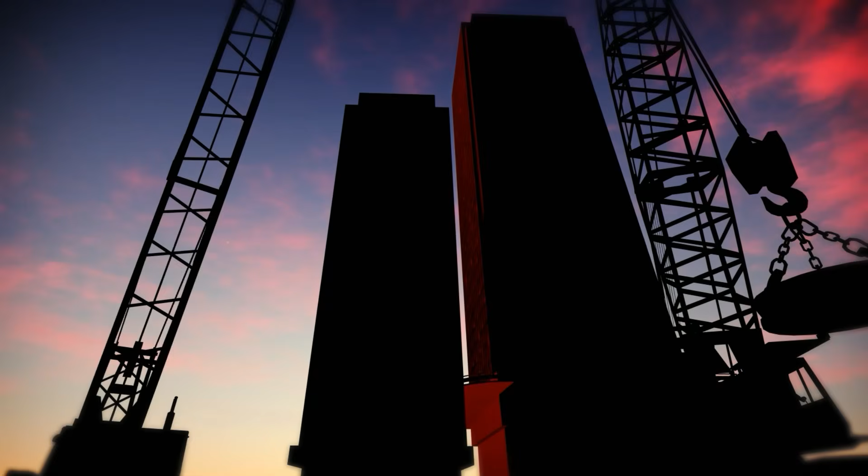On the other hand, Unit 2, also known as TMI-2, was plagued with issues. First of all, there were massive delays in the construction process, which should have only taken 6 years but wound up taking 9. Building began in 1969 and wasn't completed until 1978. That's enough time for 2 Godfathers, 2 Jaws, and 1 Star Wars. And a Star Wars holiday special, which is a different type of catastrophe.

But that wasn't all. Once the reactor started operating, it suffered a series of unscheduled shutdowns. That's bad. If your refrigerator did that, you'd take it back to the store. But a nuclear reactor is a total pain to return.

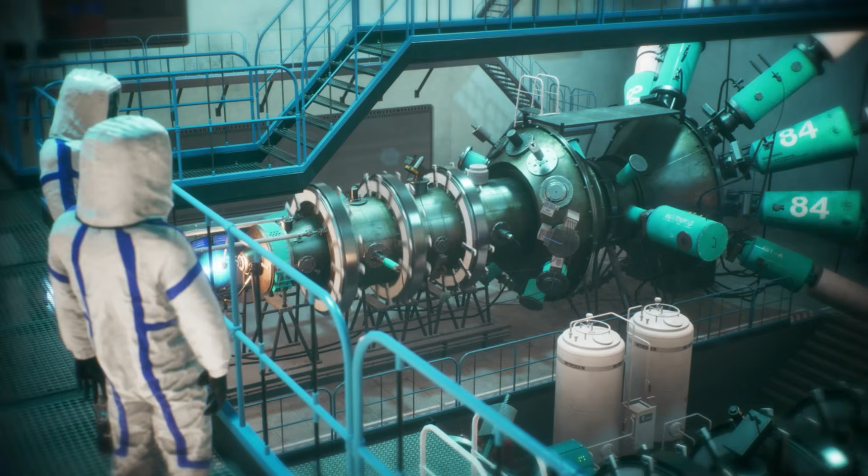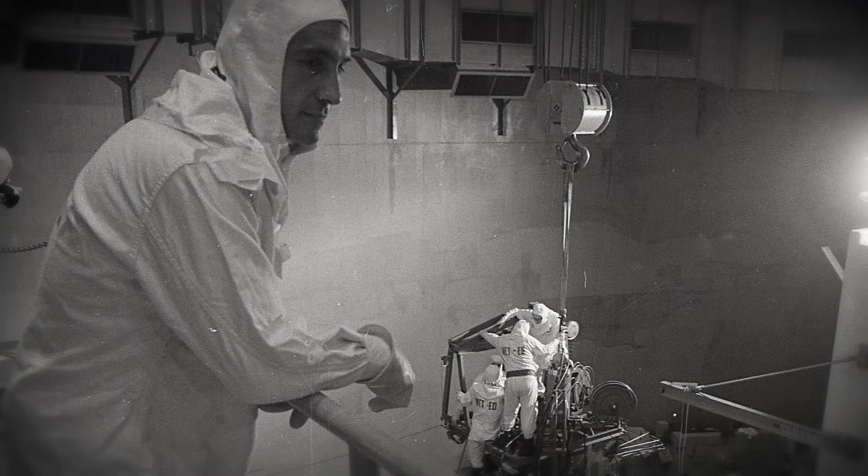The workers operating Unit 2, who weren't eager to be out of a job, didn't want the government shutting the reactor down for good. So they decided to start falsifying data about the reactor's performance to the Nuclear Regulatory Commission. And while we totally understand pencil whipping a few things if you're working the closing shift at El Pollo Loco, the stakes are a little higher when you're splitting atoms. The stage was already set for something to go terribly wrong.

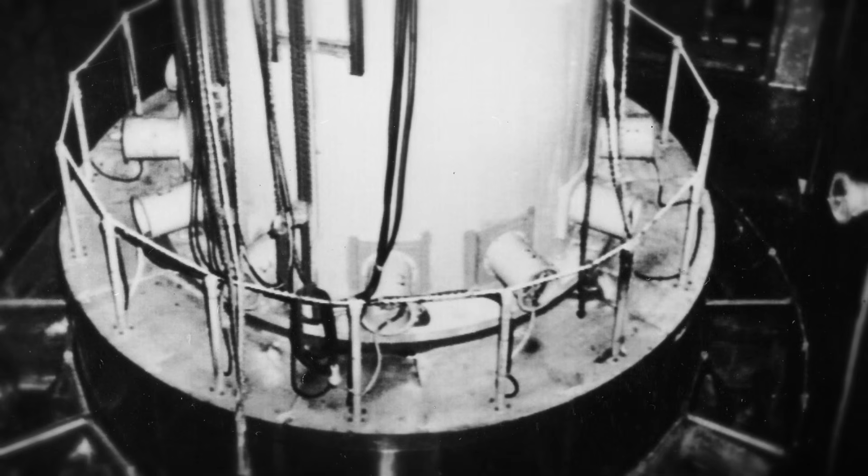On March 28, 1979, the pump that sent hot water to the reactor's steam generator failed for reasons that are still not entirely understood. Some suspect it may have been the fault of a valve getting stuck in the closed position, or water that leaked into an air line, but there's no way of knowing for sure. In response, the plant's turbine immediately shut down, expelling a huge plume of high-pressure steam.

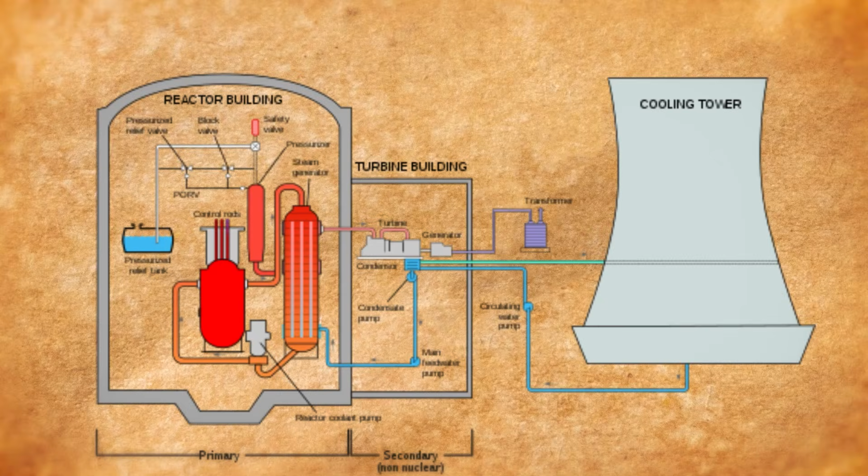Without the steam generator to feed it water, the feed water pump in Unit 2 also quit working. This particular pump was designed to provide a non-stop flow of water to the steam generators that kept the nuclear core of the plant cool, which is really, really important.

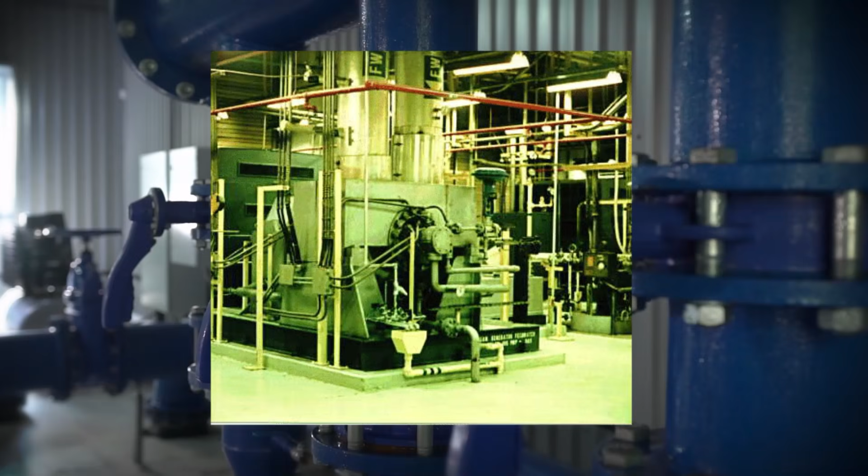As long as the nuclear core is being cooled, it works just fine. However, when it's allowed to heat up, a catastrophic chain of events begins, leading to the nuclear core going critical and then melting down. The result is a release of nuclear energy that spreads throughout the atmosphere. And while atomic clouds may grant people superhuman powers in the MCU, in real life, they mostly just give you cancer.

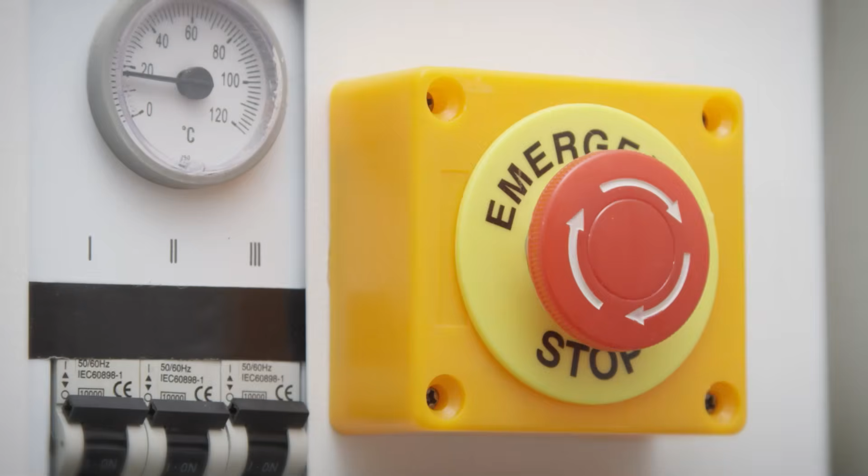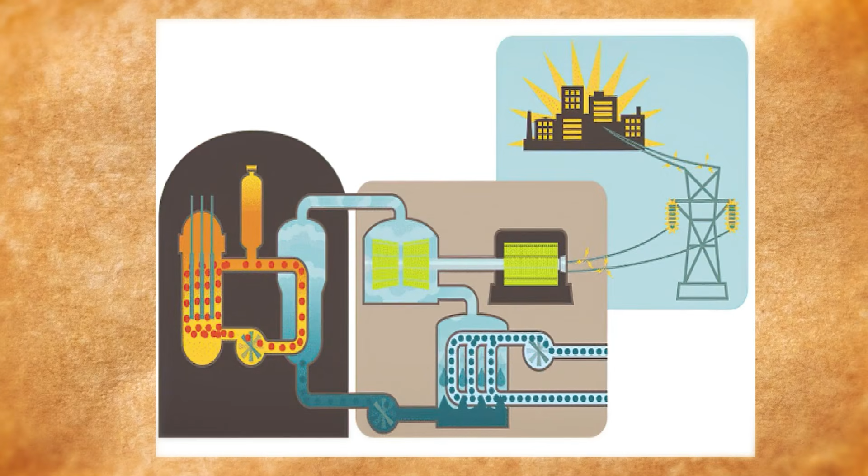When the pump stopped working, the plant went into emergency shutdown mode, and the chances of a meltdown at Three Mile Island increased. With the whole system shutting down, the pressure inside the reactor began to fall. Normally, this sudden drop in pressure would trigger the relief valve to close and stop venting steam. This time, however, the valve was stuck open, so steam kept pouring out of the plant, which steadily lowered the water levels in the reactor.

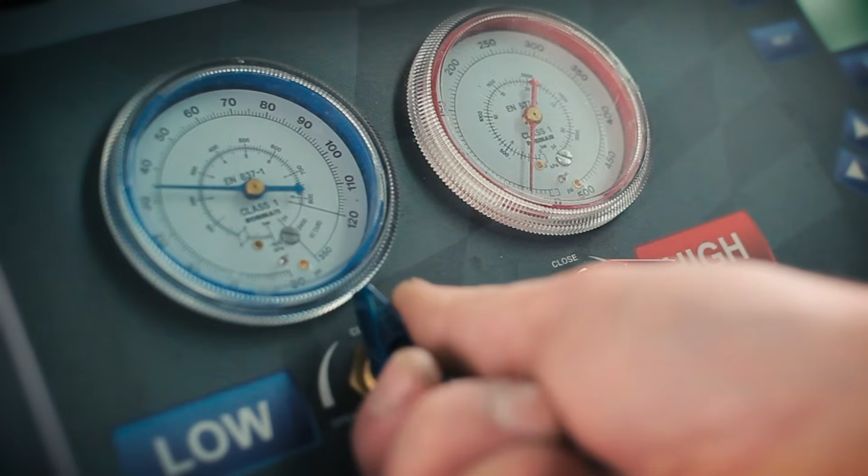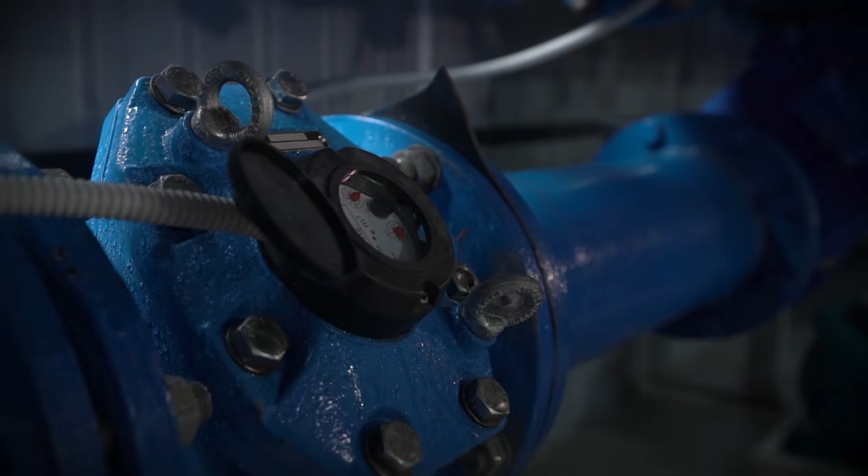At this point, you may be wondering why there weren't backup measures in place in case the feed water pump malfunctioned. Well, as it happens, there was. But like everything else at Three Mile Island that day, the backups were as effective as a drunk relief pitcher. When the main feed water pump failed, an emergency pump should have automatically switched on. However, the emergency pump's relief valve was stuck in a closed position. What is with all the sticking? Did they sculpt this thing out of graham crackers and peanut butter?

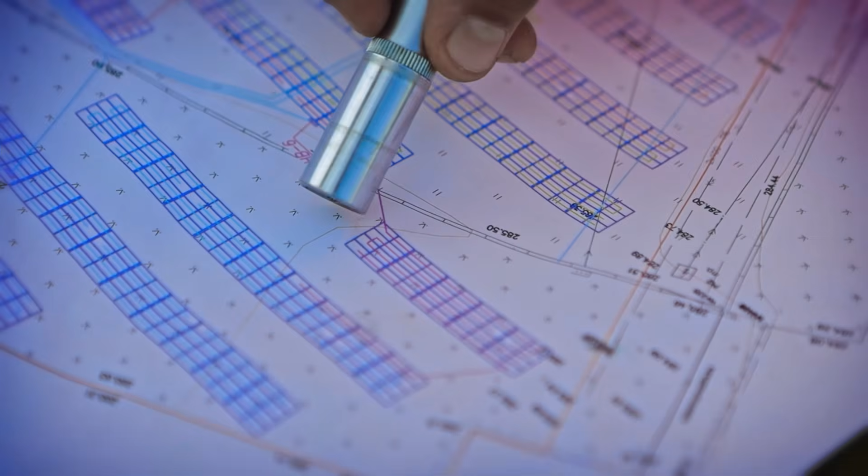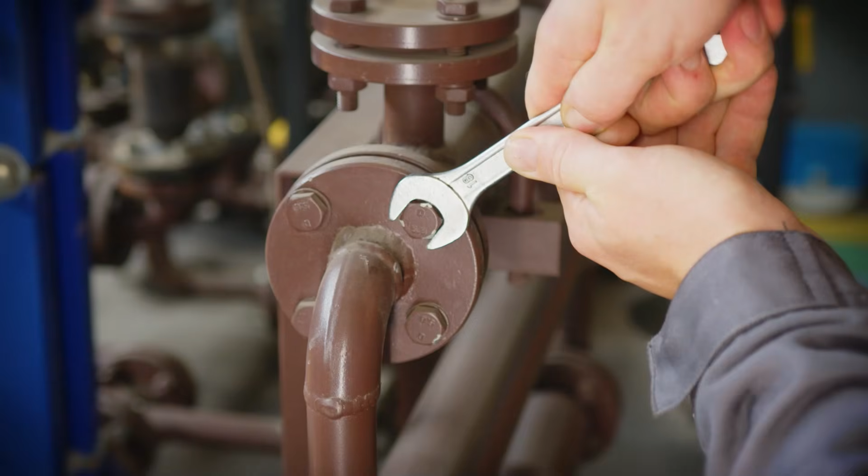While it sounds like a case of Murphy's Law, this particular failure was the direct result of human error. A few days prior to the meltdown, the backup pump was tested several times and found to be in good condition. However, in order to conduct those tests, the valve had to be operated manually. When the valve is properly open, the backup pump will kick into gear like it's supposed to. But someone left the valve closed after the tests were completed. Consequently, the backup pump did not turn on, and the water near the core kept venting out, allowing the core's temperature to keep climbing.

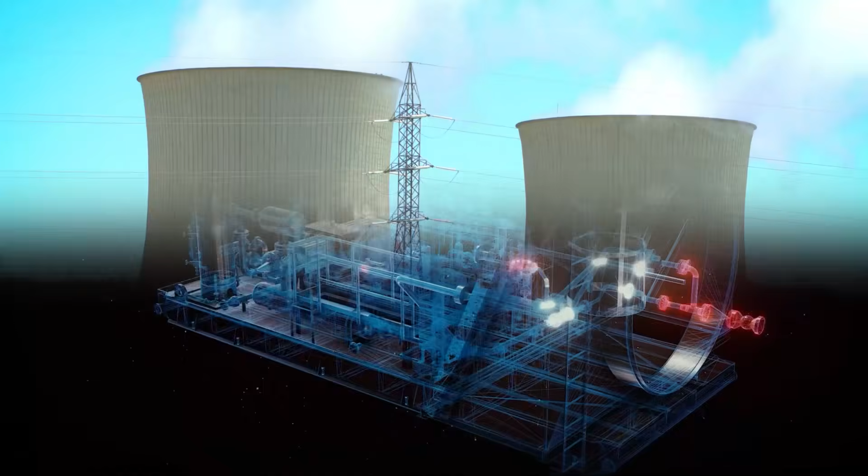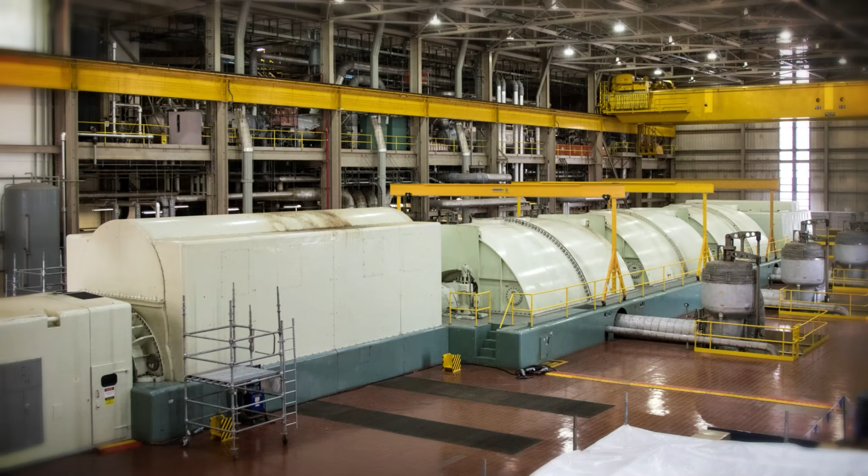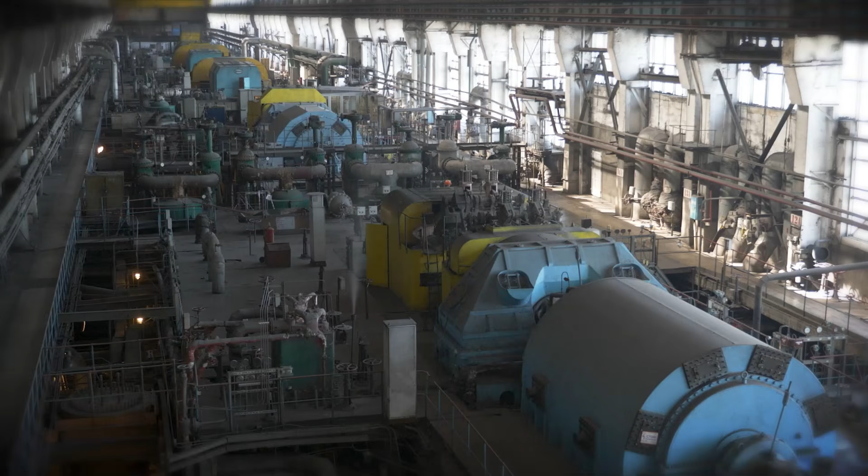And if all that wasn't bad enough, the mishaps continued to snowball out of control. The instrumentation in the control room failed to alert the operators of the growing problem. They could tell the main pump had stopped but believed that the backup pump was working properly. It didn't help that the emergency pumps in that reactor had turned on for no reason several times in the past, so workers had been conditioned to assume it wasn't anything serious. And even though the valve venting steam was stuck open, the control panel's confusing readings seemed to indicate it was closed. The operators had no idea that cooling water was steadily leaving the reactor in the form of steam.

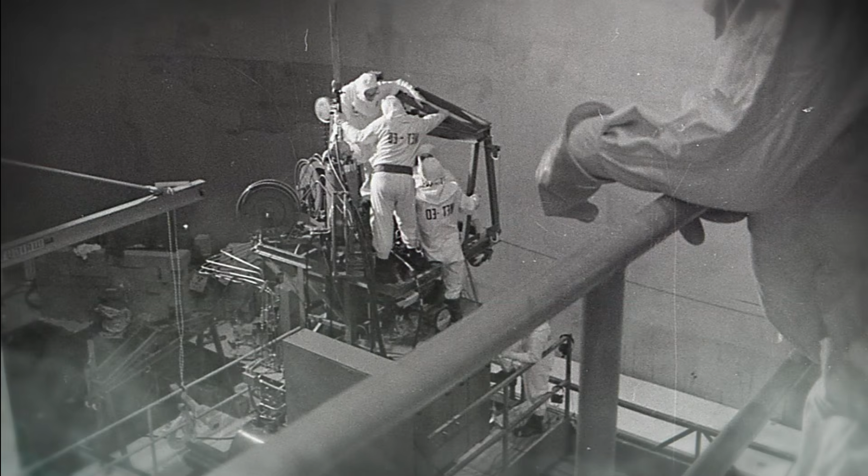The general design of the plant didn't help matters either, as there wasn't any way for the operators in the control room to see how much water actually surrounded the nuclear core. Because of this, and the faulty readings in the control room of Unit 2, workers thought the situation was under control.

They believed the reactor was filled with water, while in reality, it was filling with steam. So, in order to prevent the reactor core from getting flooded, the workers shut down the water flow. This just made the core, which was already dangerously low on water, even hotter. According to a follow-up report, there were 2 gauges that should have been checked before taking action. An employee later admitted to having checked only one, which led him to believe the space was filling with water instead of running dry. Mounting steam pressure then caused the coolant pumps to start vibrating, so plant workers turned the pumps off to keep them from getting damaged.

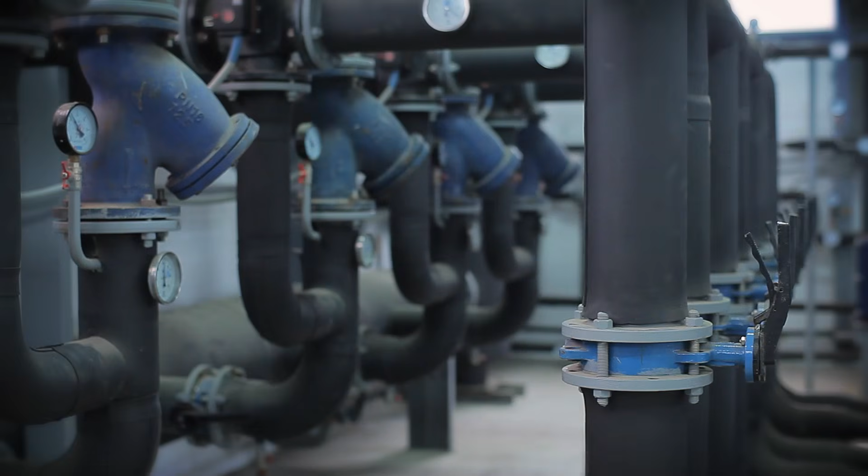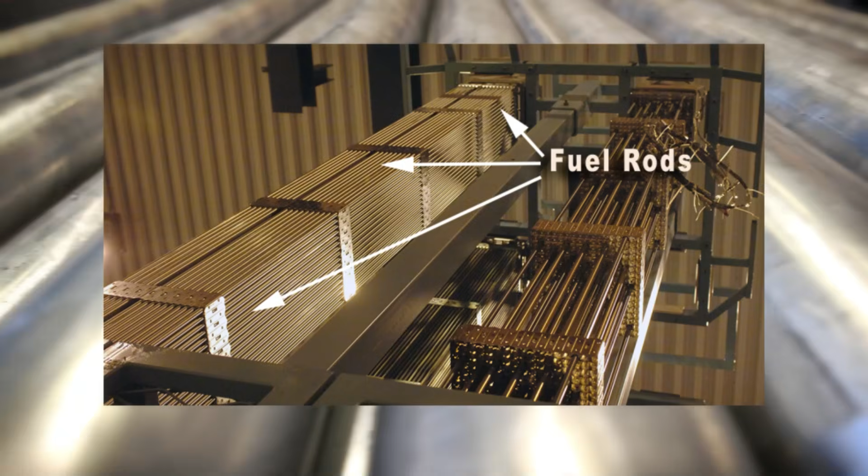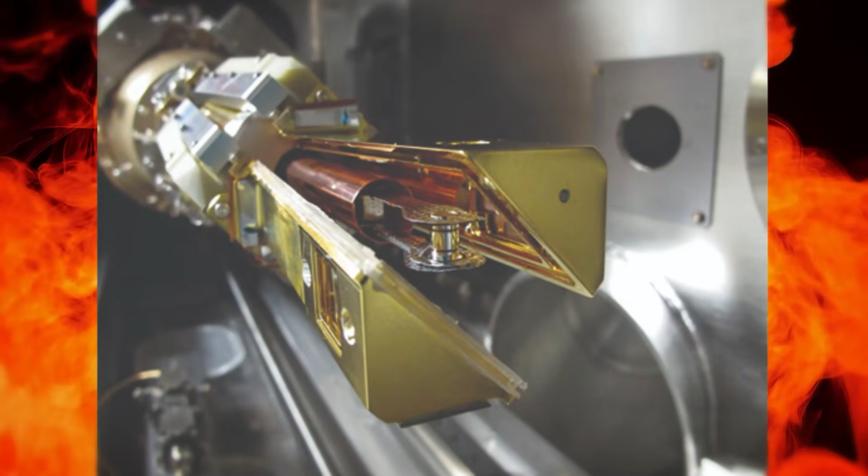At that point, the flow of water that cooled the Unit 2 reactor core had been completely halted, and the effect was exponential. Since fresh water was no longer flowing into the reactor, large portions of the reactor core became uncovered as steam and old water escaped. The fuel rods, which held the nuclear pellets that fed the reactor, started to melt. To give you an idea of just how serious this failure was, the rods were made of zirconium, a compound with a melting point of about 1,850 degrees Celsius, roughly 1/3 the temperature of the sun. That is hot. A full-scale meltdown had begun, and nobody knew it was happening.

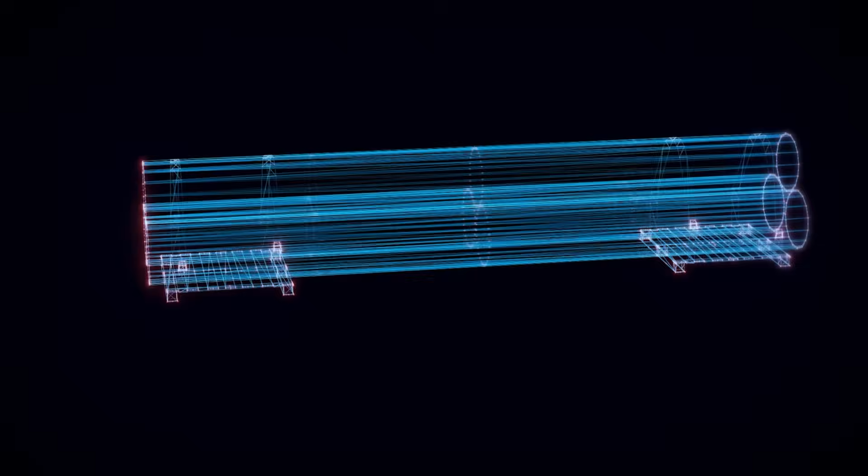Unfortunately, the people working in the control room on the morning of March 28th waited too long to properly check the water levels in the reactor core. While the problems had started at 4 a.m., nobody realized the water had to be manually switched back on until 7 a.m. During that 3-hour window, the reactor core melted down.

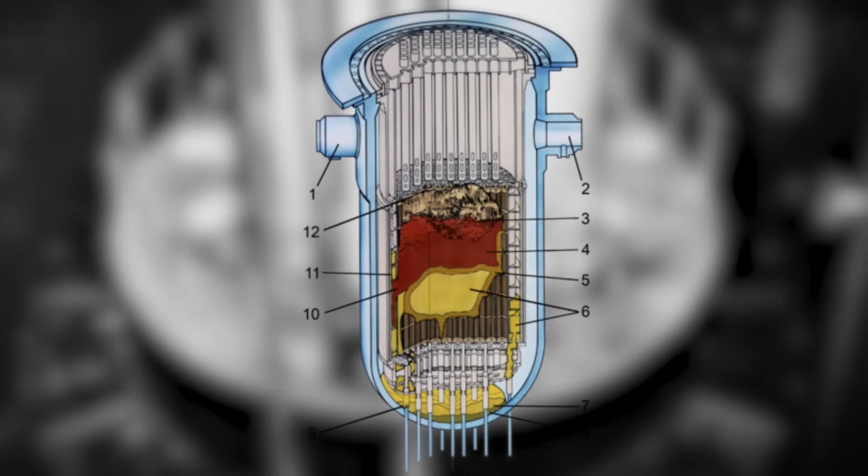Once the control room operators realized what was actually going on, they turned the water back on and manually closed the stuck valve. However, by that time, they were left with 60% of the core seriously damaged. By 7:45 a.m. on the morning of March 28th, there were around 60 people in the control room trying to manage the situation and prevent it from escalating any further.

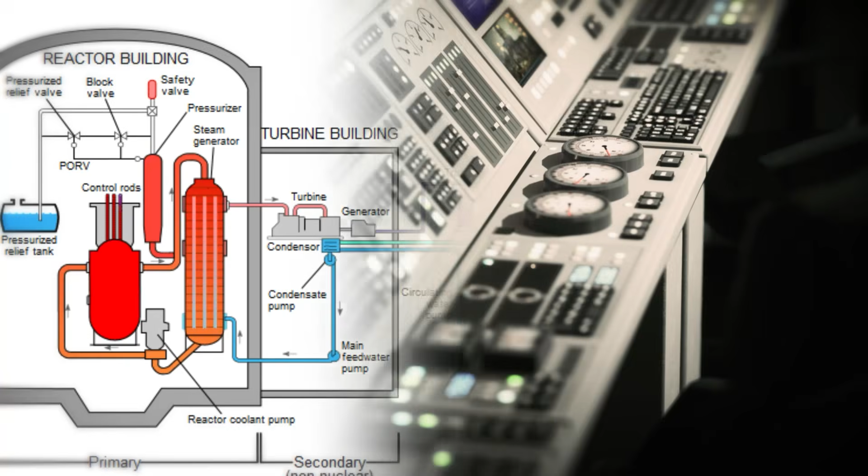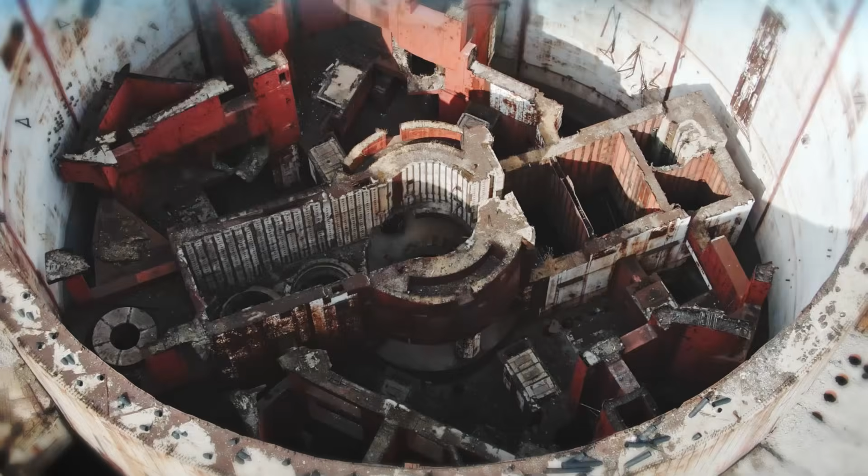None of them knew that the nuclear fuel rods were already melting down into a radioactive sludge and pooling at the bottom of the reactor. When they eventually realized this several hours later, the only thing they could do was hope that the 5-inch thick steel bottom of the reactor wouldn't boil away like the T-1000 at the end of Terminator 2. Thankfully, the bottom of the reactor held, preventing a full meltdown. The water finally managed to cool the nuclear sludge before things got any worse.

Even though the crisis on 3 Mile Island occurred on March 28th, it wasn't until 2 days later, March 30th, that officials finally spoke up and informed nearby residents that they should maybe think about staying indoors and keeping their doors and windows shut tightly to avoid breathing in potentially contaminated air. When a hydrogen bubble, which is a hazardous cloud of air, was found to be pushing against the top of the reactor, Pennsylvania's Governor Dick Thornburgh finally requested that children and pregnant women in a 5-mile radius evacuate the area. Luckily, no health effects were experienced by any residents as a result of the meltdown. But had the incident been worse, waiting 2 days to declare an emergency evacuation would have been catastrophic.

The only real winners from the disaster turned out to be the producers of the 1979 movie The China Syndrome, starring Jane Fonda, Jack Lemmon, and Michael Douglas. The film, which revolves around a disaster very much like the one at 3 Mile Island, had opened only 12 days before the accident, and it rode its sudden relevance to become a smash hit and nab 4 Academy Award nominations. The real-life fallout, no pun intended, was a lot less exciting.

According to the New York Times, cleanup from the accident was finally concluded around August 14, 1993, nearly 14 years after it happened. Among other things, the process entailed the cleaning of 2.3 million gallons of wastewater. Turns out, you just can't run rad water through a Brita.

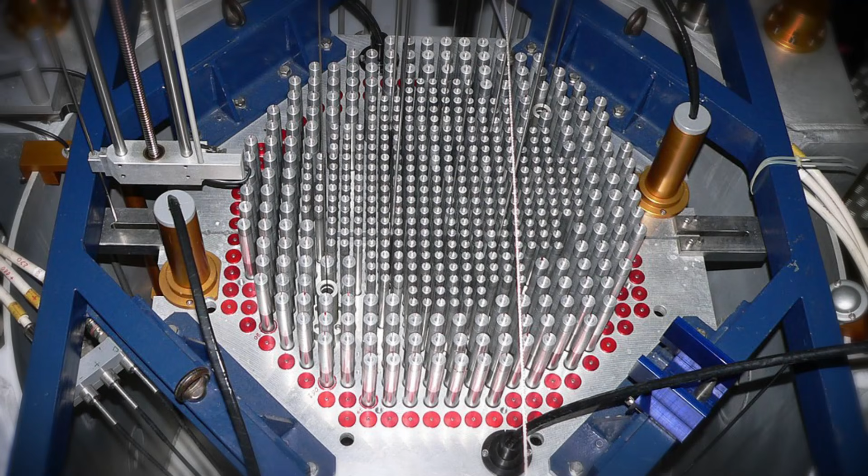Reactor Unit 2 was permanently shut down after the accident. However, in November of 2010, its damaged electrical generator would be refurbished and installed at Shearon Harris Nuclear Plant in New Hill, North Carolina. Did not know there was an aftermarket for nuclear reactor parts. That feels like a thing you should buy new.

Reactor Unit 1, which was offline for refueling during the disaster, was brought back online in October of 1985. Despite several federal court injunctions and massive public opposition, it would remain in use until it was finally shut down 34 years later, on September 20th, 2019. Interestingly, the plant wasn't shut down for any technical reasons. To the contrary, its license to operate was secure through the year 2034.

Nope. TMI-1 was shut down because the company who owns it, the Exelon Corporation, wasn't earning enough money from its operation. Exelon announced in May of 2017 that they would close the plant unless the state made policy changes or created other incentives that would help defray operational costs. But the state evidently decided not to intervene. The decommissioning of Unit 1 will take nearly 60 years and over $1 billion to complete.

Should have subcontracted that out to Wolverine. He took it down way faster.